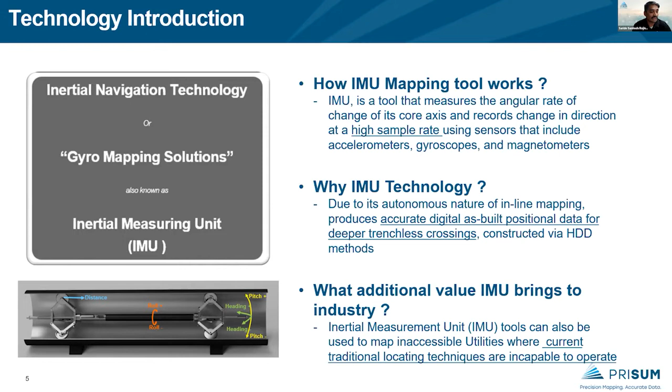So what additional value does this IMU bring to the industry? We already have many technologies which are able to locate these underground utilities to a higher accuracy, but there are a few instances where this existing technology becomes very limited because of the access. For example, if you're operating in an urban environment where satellite reception is very difficult, then all above-ground tracing equipment will be limited in locating the underground utilities. The IMU mapping tool, as I mentioned, is autonomous in nature. So it could be used to map any utility that's going underground. That's one of the advantages it's adding to the industry.

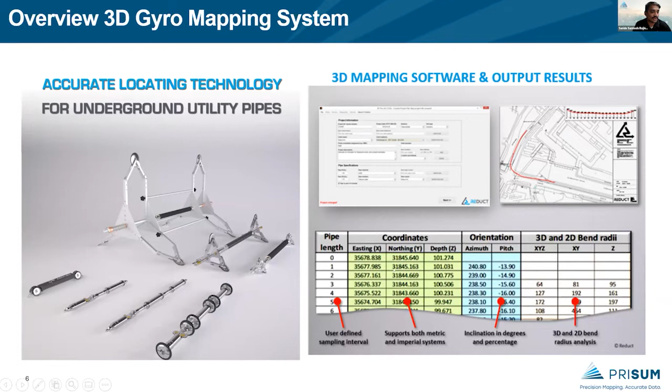These are the two components that are very important for this technology. The picture that you're seeing on the left is the hardware which is going to collect the data. And the picture on the right side is the software, which is going to process the data and generate the results. So as I mentioned, the first step will be the data collection. We need to pull the tool from point A to point B.

There is a broad range of tools that are available. The smallest pipeline that can be mapped is 1.25 inches, and the biggest is 30 inches. The principle of functionality is the same, but there will be a centralizer which is going to be riding on the ID of the pipe. So the smallest is 1.25 inches and the big one is 30 inches.

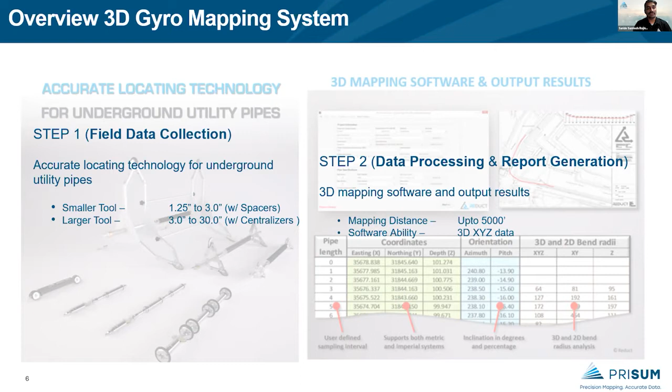The tool has the capability to map up to 5,000 feet. So basically you're mapping 5,000 feet with the access on either side. You don't really need any above ground access, but you should be able to generate XYZ all along the 5,000 feet with the GPS coordinate every 1 foot.

I want to touch base more on some of these benefits about these gyro mapping tools. The first one is this technology is not limited to any specific utility, whether it is sewer or water main or electric power conduits, or even telecom or gas and oil. Irrespective of what the utility is, it should be able to map those underground pipes. Again, basically the idea is we need to provide the provision for the tool to ride on the ID of the pipe, and the rest of the job is done by the tool and the software to generate the reports.

Again, some of the technology has limitations because if it is an unlocatable pipe or if there is no tracer wire, then that becomes more like a limitation. But for gyroscope mapping, whether the utility is a metallic pipe or unlocatable plastic HDPE or concrete pipe does not matter. It should still be able to generate the accurate plan and profile for the utilities.

And the biggest benefit is, as I mentioned, IMU is completely autonomous in nature. There is no tethered cable, and it's not even communicating any signal to the above ground equipment. All the data is stored within itself, and once you run the tool, you need to take it out and connect it to your laptop to start processing the data.

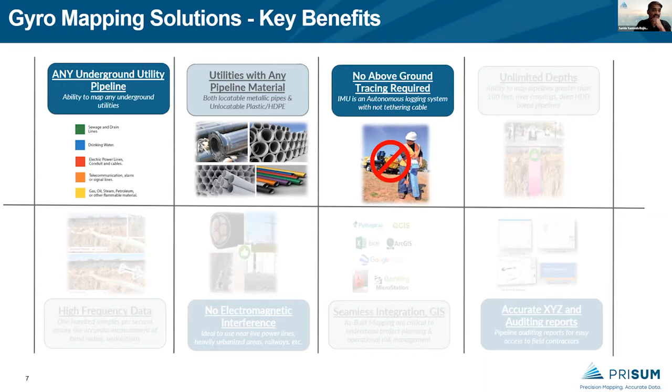Whereas with EMI or other technologies, you need to have that above ground access to scan the tool. So by doing this, with this IMU tool, we won't be creating any traffic disruption or any other noise above ground. So basically, we just need access on either side through the manholes, and we should be able to generate the data.

One of the other biggest benefits is because of its autonomous nature and storing data within itself, it can map the utilities which are going under the rivers, sometimes 100 feet or even deeper under the rivers. We should still be able to locate the utilities. Irrespective of what the soil conditions are, the data quality or accuracy will not be affected.

The other important thing is high frequency data. So what we're trying to show here is if someone is scanning above ground, they're going to generate a GPS coordinate every 10 feet or 25 feet or even 50 feet, and later connect those through a point cloud. But IMU mapping is generating a GPS coordinate every 1 foot that accurately predicts the critical bends and undulations in the pipe. Because of collecting 100 samples per second, it should be able to generate this accurate profile.

Again, if there is a gas line which is located right by a power utility, and someone is scanning above ground to get the location of that utility, there's going to be a lot of electromagnetic noise from those neighboring utilities. Gyro mapping technology does not have any components which will be affected by the neighboring utilities. So the data accuracy is going to be very precise.

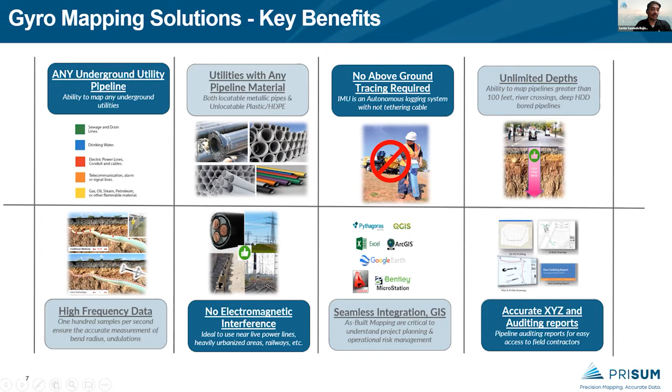The other thing is all the data that comes out from this software, it's open platform software. All the data could be seamlessly integrated into any GIS system, whether it is Esri or Bentley. And the last one is once we perform the mapping, we are able to generate an auditing report, which is going to be very helpful for the contractors to get a better understanding of what they are operating. That's a quick overview of the benefits.

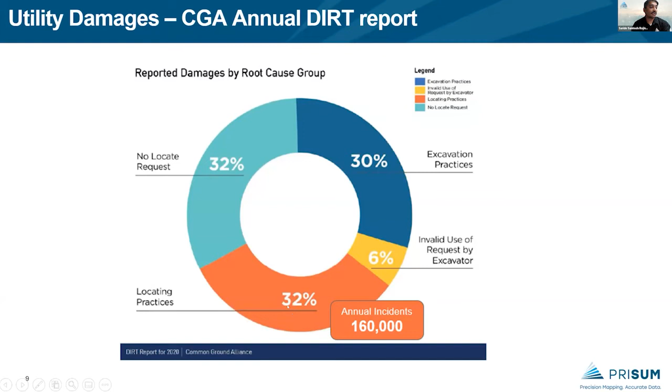I want to just touch base on the recent CGA DIRT report that has identified that 1/3 of the damages that are happening are because of the locating practices. So approximately 160,000 incidents are happening because the contractor does not know where the utilities are, or someone performing incorrect locating. So what are the potential reasons for these damages?

There are so many abandoned lines underground; almost 41,000 incidents that happened in the year 2020 are because of hitting these abandoned lines. And again, abandoned lines are treated as a live line, and we should have a better understanding of where these abandoned lines are. And just combining the abandoned lines and locating errors, it's nearly 100,000 incidents that were happening.

And the other important thing is most of the expensive GIS systems, which are powerful tools, are currently populated with the as-planned data, which is developed during the design phase. But once a contractor is in the field, he has to take deviations around. Again, there may be good reasons. There may be a rock which he has to take a deviation around. So he takes a deviation, but no one is going to go back and put these accurate as-built maps into

the system. If someone is accessing the ground to put in a new utility, maybe 5 years from now, and they are looking at the as-planned map, there is a high possibility that they may cross-bore into the existing utilities. So it's important that all these GIS systems are populated with the as-built map.

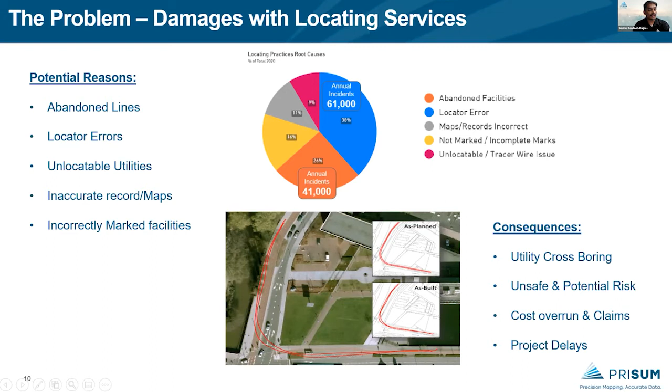So now let me get into the actual topic, which is the New Jersey DOT project, where we have worked to locate some of the utilities. Again, this is a huge project. It's estimated at $320 million, and they are trying to replace a bridge. This is a very critical bridge connecting Stafford Township and Long Beach Island. And this is the only connection for this island, which makes it a very critical bridge.

And they are trying to make some replacements to the bridge, and they want to know where the utilities are so that they don't damage them. Again, this is a $320 million investment, but it has been properly designed by New Jersey, and it's been broken into 6 separate projects so that they have a very good understanding. They have developed a team called the smart scoping team, and this team was performing value engineering to make the right decisions and to avoid any potential damage to the critical infrastructure.

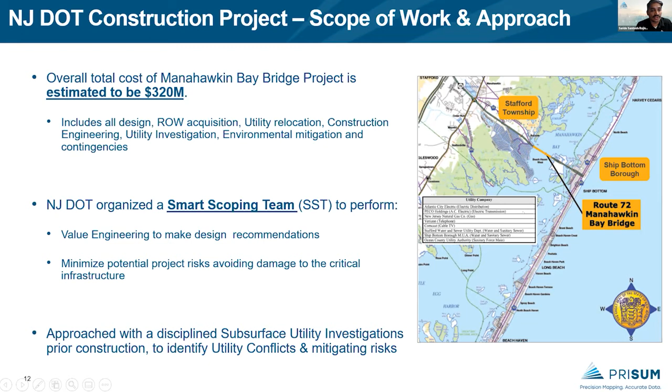They have adopted this disciplined subsurface utility investigation prior to construction to know where the utilities are and also come up with mitigation plans for the risk. There are so many utilities involved. It's hard to read here, but telecom, Comcast, water and sewer, and electric conduits. So they want to get a pretty good understanding of where these utilities are when they are trying to replace this bridge. Again, I'm trying to drill down to the very specific situation that we encountered on this project.

So they are trying to build a drain line, as the island was getting flooded during the rainy season and also because of the high tides. So they want to build a new drain line into the water. For the existing water main, they don't really have a good understanding of where the water main is. They are just going off of the as-planned map, which is not reliable data.

Again, this is very critical infrastructure. This is the water main which is connecting the whole island. And if they cross-bore or damage this water utility, then this is going to leave the whole island without water until the utility is repaired. In order to build this drain line, the first thing they have to do is build a coffer dam near the water main. But not knowing the true depth of this water utility, they cannot build a coffer dam, because there's a possibility that while they are piling the sheets, they may cross-bore into the water main.

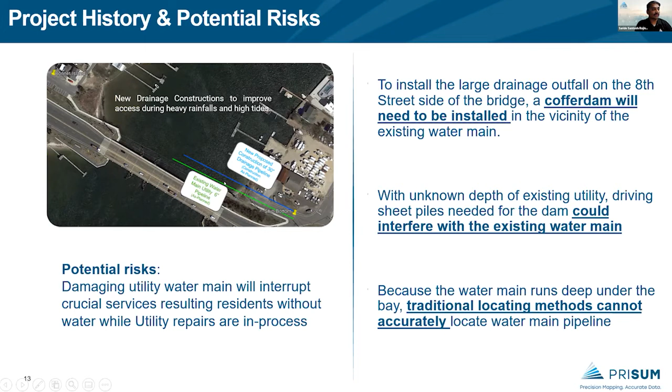So the idea is to locate the true location of this water main. But traditional locating equipment does not have the ability to do anything underwater. And PriSUM was helping the group to locate this water main. Of the 5 parties involved, we were working with the New Jersey DOT and also WSP, which is a subsurface utility engineering firm doing the design construction. And we're also working with MNS and also the Mathis Construction Company, who are doing the utility relocation.

The basic idea is to understand where the water main is so that there is no damage to the water main. So they have to excavate the water main on either side of the island for us to launch this mapping tool. We were launching the mapping tool on one side, and we had to collect the mapping tool on the other side. So basically, we will be running 4 runs from point A to point B. And the idea is to see whether the data that we collected is repeatable or not.

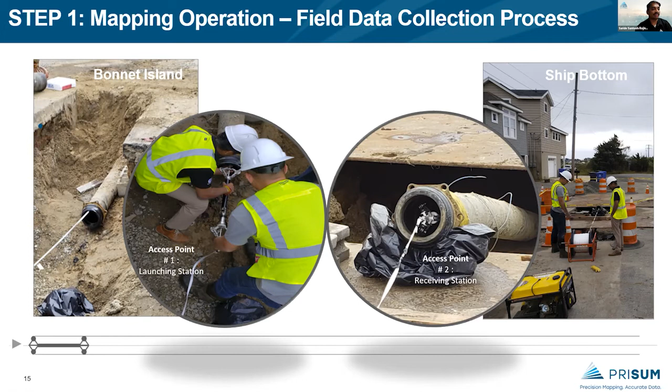And in this scenario, we got highly repeatable data, giving an indication that the data collected by the tool is very accurate. I'm going to show what level of accuracy we have attained on this project. The other important point: once you collect the data, the critical input for the software is known GPS coordinates on either side of the waypoint. So we have collected survey-grade GPS coordinates with centimeter precision on point A and point B, which become an input to the data.

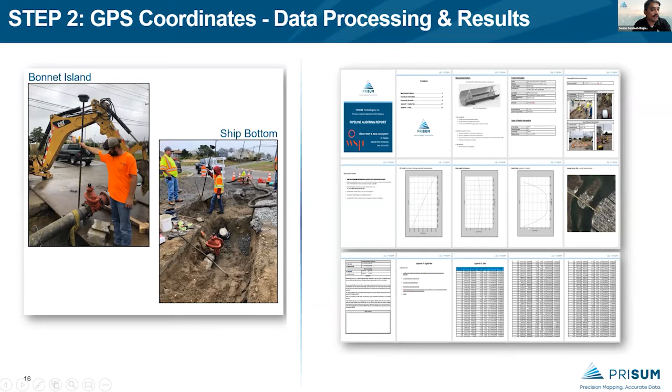And once we process the data, we should be able to generate an accurate XY area view, and also show how the depth is changing from point A to point B. And this is the final auditing report that the client was really interested to look at. So let me give a little bit better understanding here.

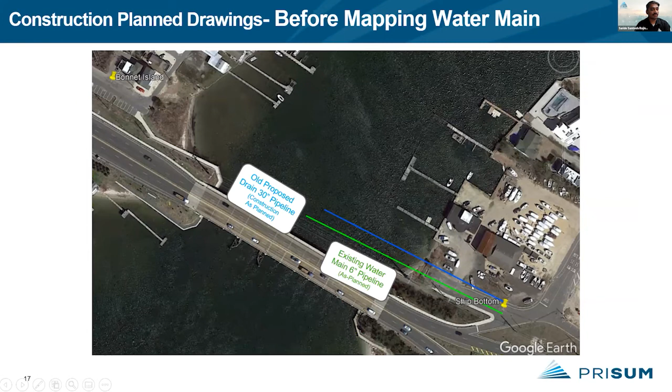Again, cross-boring into this water main would have been very expensive to the project, not only on the cost, but also the project delay. So once we provided this accurate information of this water main, the team went back to the drawing board and started redesigning this new drain line, trying to ensure that there is enough room for the coffer dam and also the water utility.

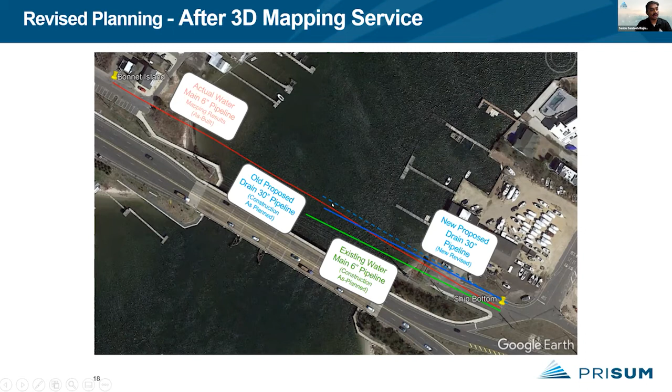So this specific project was just a one-day activity where we were able to run the tool and also show the results to the New Jersey DOT on the same day. So we don't really have to spend a lot of time. The overall operation time for this project was 2 hours, and we were able to collect the data and share the results right in the field.

So WSP, who was the project manager on this specific project, took the data, and the primary interest was to understand the true depth of this water main at this specific location. And we were able to give them a GPS coordinate every 1 foot, so they know the depth at this specific location, and they designed the coffer dam accordingly so that they don't get close to this water main.

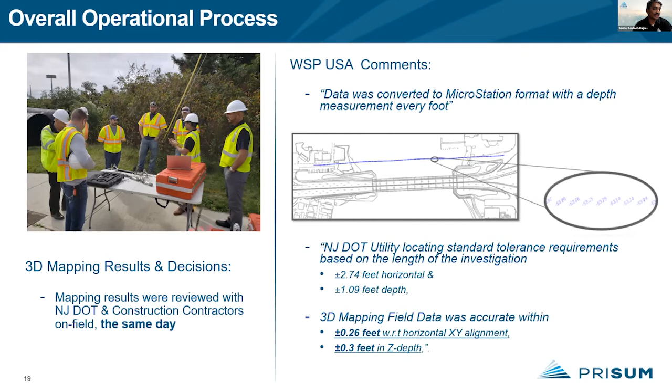So according to the New Jersey DOT, the locating standard tolerance is plus or minus 2.74 feet in horizontal over the length of investigation. And the accuracy they were looking for was 1.09 feet in depth. But the 3D mapping data that we collected and shared was much more accurate. It was 0.26 feet accurate in XY and 0.3 feet in Z. So this is highly accurate information, which really helped the team make viable decisions in the field and ensure that there is no damage to the water utilities.

Again, we shared this information with the New Jersey DOT. They were pretty happy because they were not sure this technology existed. So it really helped them keep the project on time and avoid all the risk upfront with the mitigation plan of locating the water main.

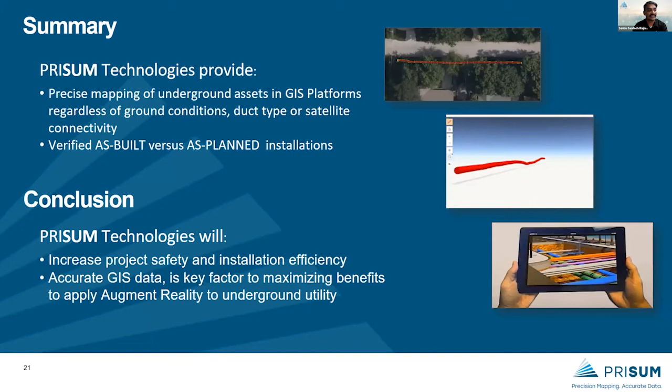So I'm getting close to the end of my presentation. I want to give more time for questions, but the industry is moving towards augmented reality. Augmented reality tools are very powerful, and it's very important to maximize their value by getting the as-built data. If you are putting as-planned data into these powerful tools, you will probably be defeating the purpose of the technology. So it's very important that all network owners generate accurate as-built maps and enrich their GIS systems. So that concludes my presentation.